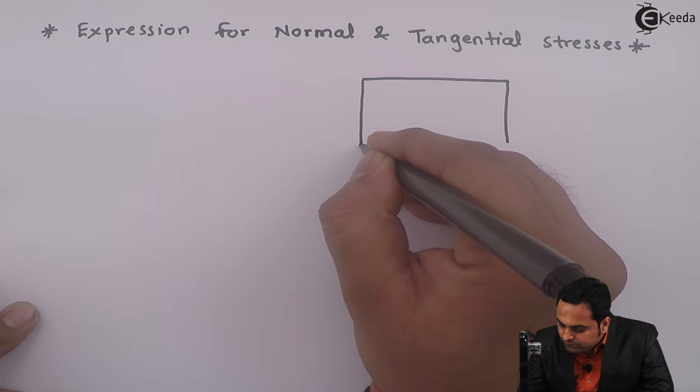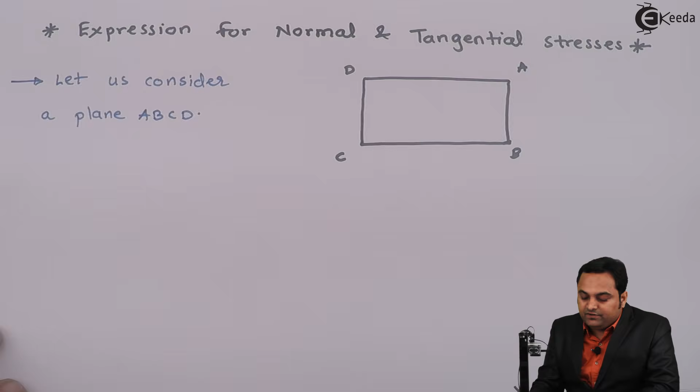Now here I have drawn a plane ABCD. I'll say that while deriving the formula, let us consider a plane ABCD. Now once I have considered this plane, the next thing is I'll denote stresses on this plane.

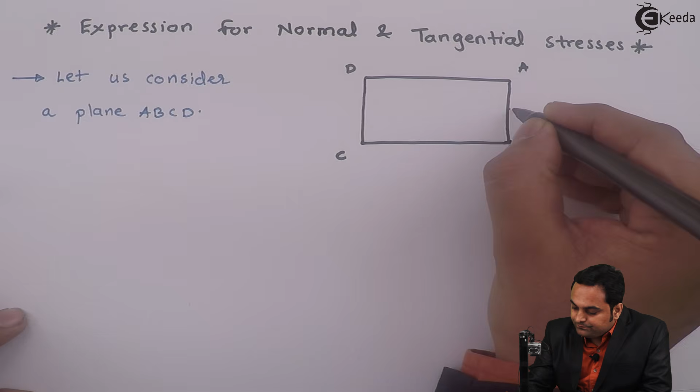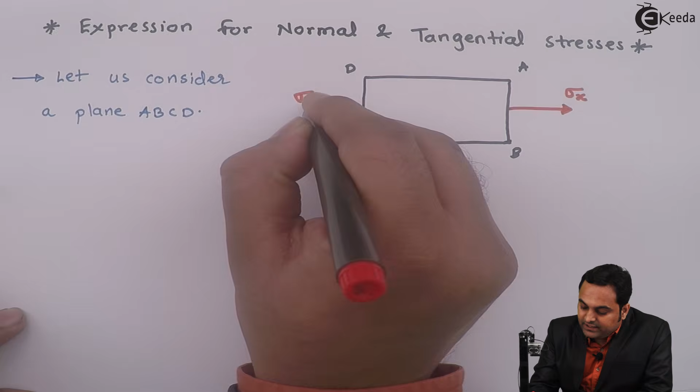So on AB, here I'll denote stress along x direction. On CD, also stress along x direction. So because of sigma x, there is tensile stress developed in this plane. Next, tensile stress along y, sigma y.

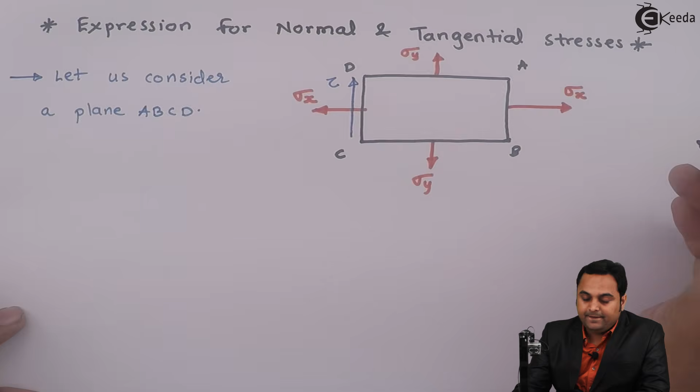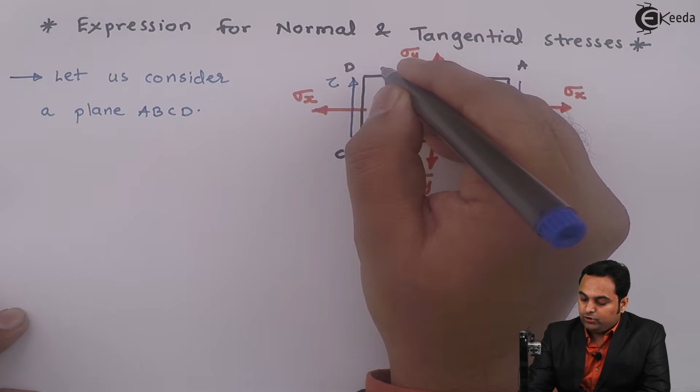Apart from this, I'll also denote shear stress tau on face CD, acting upward. So for shear stress to be produced on AB, I'll assume the shear stress is acting in downward direction. Similarly, along AD, the shear stress would be towards left. Along BC, it would be towards right.

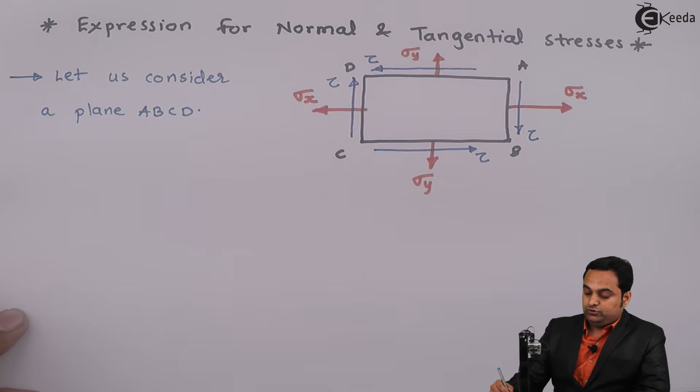So after considering the plane, I'll say let sigma x be stress along x direction, and this will be tensile stress as per our assumption. Next, similarly, I'll write for sigma y. Let sigma y be stress along y direction, that is also tensile stress.

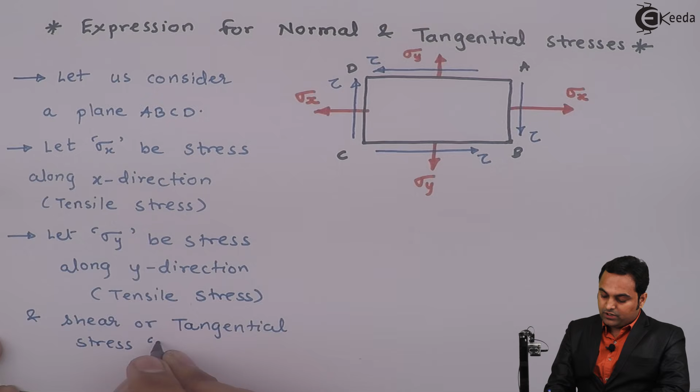Next, and shear, or I can say tangential stresses tau, which is acting on the plane.

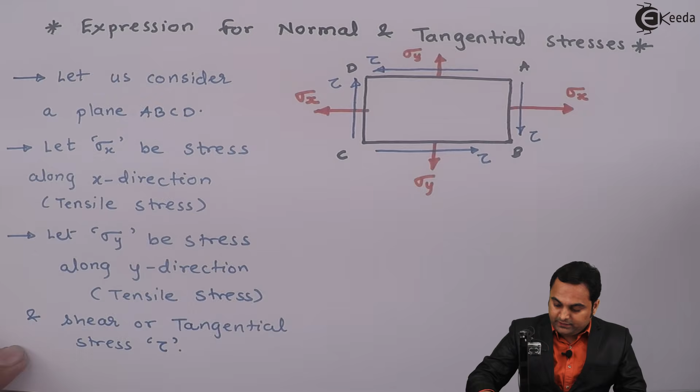Now, inside this plane, I am taking an oblique or inclined section. I'll call it A suffix E, that is AE is the inclined plane. Its inclination with the vertical AB is theta.

Now when we are deriving this expression for normal and tangential stresses, I'll consider the oblique section, and we are going to find the normal and tangential stresses on this oblique section or plane AE. So for that, I'll take this part or this triangle separate and I'll draw it here.

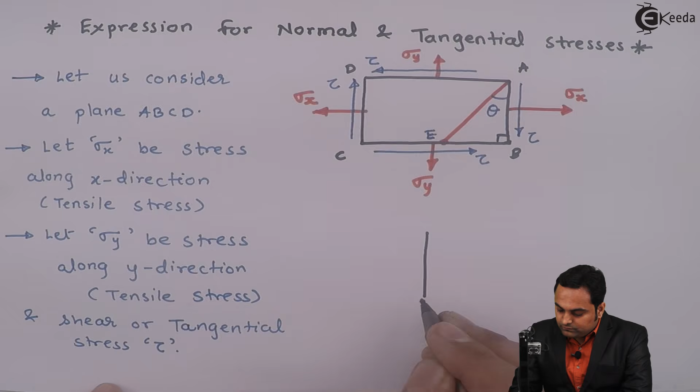Now this triangle is ABE, a right angle triangle, on which there is sigma x acting along x direction on face AB. Then there is shear stress tau acting downward on face AB. Next, sigma y is acting downward on BE, and tau is acting on BE.

Then, apart from this, on the oblique section, there will be one stress which is perpendicular to the oblique section, called normal stress, denoted by sigma suffix n. Then there will be one stress parallel to AE, and this stress will be called tangential stress.

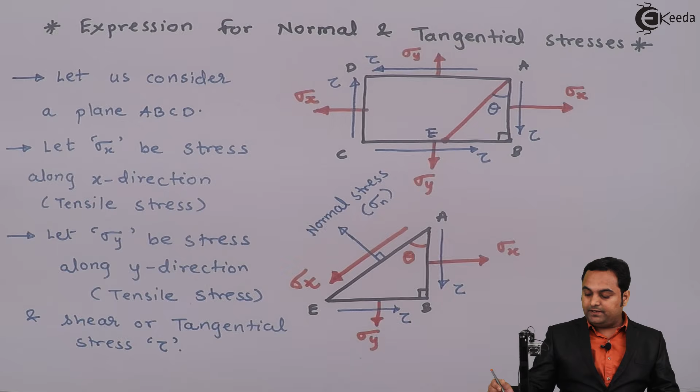So now if we see, on face AB there are two stresses, on face BE there are two stresses, similarly on AE there are two stresses. So because of these stresses there would be forces acting on the member, and here this I'll call angle theta.

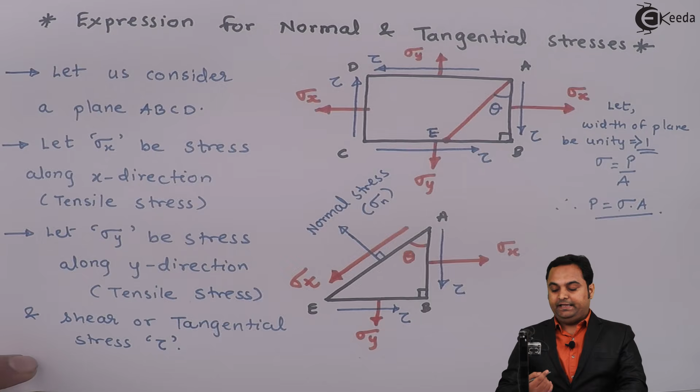So here I'll write all the forces in the form of stress into area. If I consider AB, I'll say let width of plane be unity, that is equal to 1. So if I am assuming the width as unity, area becomes AB into 1, which is AB.

So forces acting on AB, first I am considering sigma x. So because of that the force acting would be sigma x into area, which is AB into 1, because width is 1, and here we can write it as sigma x into AB. So this is the force acting on AB because of sigma x. Similarly, because of shear stress tau, this tau I'll call tau AB. So there is shear stress tau acting on face AB, and the area is AB.

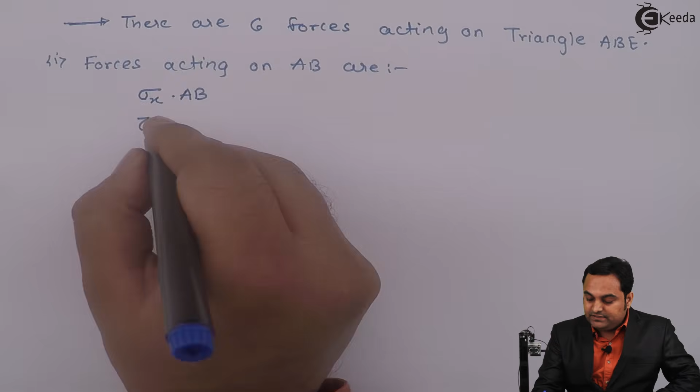So now here I have written forces acting on AB are sigma x into AB and tau into AB, because area is equal to AB into width, and here width is 1. So therefore area is equal to AB. So these are the forces acting on AB. Next, forces acting on BE, that is this side BE.

Forces acting on BE are: first there is sigma y into BE, width is 1, so area will be only BE. Next there is tau acting on BE, so tau into BE, area is only BE.

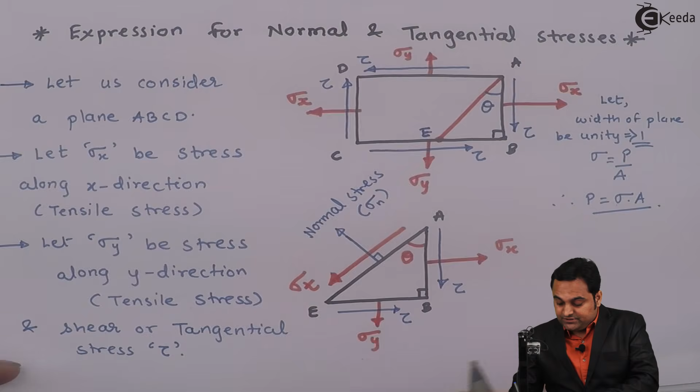Next, forces acting on AE are, as I can see in this triangle, AE is the hypotenuse. So the forces acting: first sigma n into AE, that is the normal stress into AE, area is AE into 1, so it becomes AE. Next, sigma T, that is the tangential stress, so sigma T into AE. So these are the 6 forces acting on the triangular element which we have taken out of the plane ABCD.

Now if we see in the diagram, we are having a right angle triangle and the forces are acting over that. So we are considering the inclined plane, and for us the parallel component acting upward will be treated as positive x-axis, parallel component downward will be negative x-axis, then the axis perpendicular to the inclined surface will be positive y-axis, and here we would be having the negative y-axis.

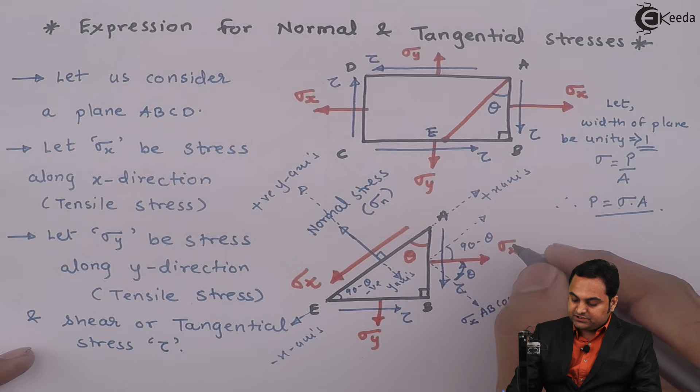So here the component is sigma x, that is the stress, and force is sigma x into AB cos theta, because I am resolving the forces. Here it is stress, force is sigma x into AB cos theta, sigma x into AB sin theta. So the first component is sigma x AB cos theta, sigma x AB sin theta.

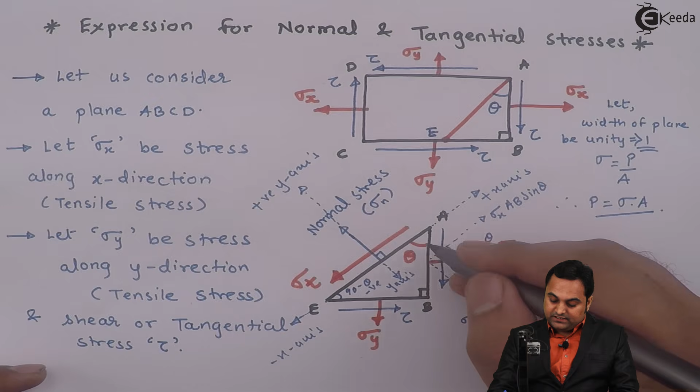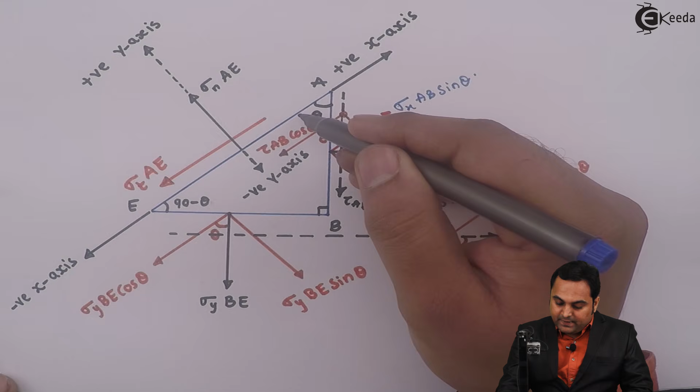Next, on this face we even have shear stress tau, which is tau AB, so tau AB is the force. Now again, if I draw a parallel component, I will get 2 components of tau AB, and that 2 components are tau AB cos theta, tau AB sin theta, because tau AB was the shear force acting on AB. Parallel to this plane I have drawn a line, so this angle becomes theta. So here we have tau AB cos theta, and here there is tau AB sin theta.

Next, if I consider the face BE, on this I am having the force sigma y into BE. Now if I draw a line parallel to the plane, here I have a component, this is inclined at theta, because theta is the inclination of the plane with vertical. Similarly for this parallel line to the plane, there is theta angle. So here I have the component sigma y BE cos theta, sigma y BE sin theta.

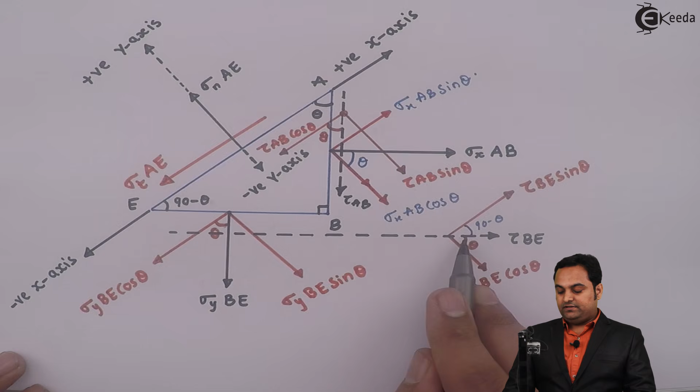Next, on this plane we have shear stress tau BE. Now if I draw a line parallel to the plane for this tau BE, here I have this angle as 90 minus theta. So this component which is perpendicular to the parallel one will have an angle theta. So tau BE cos theta, tau BE sin theta.

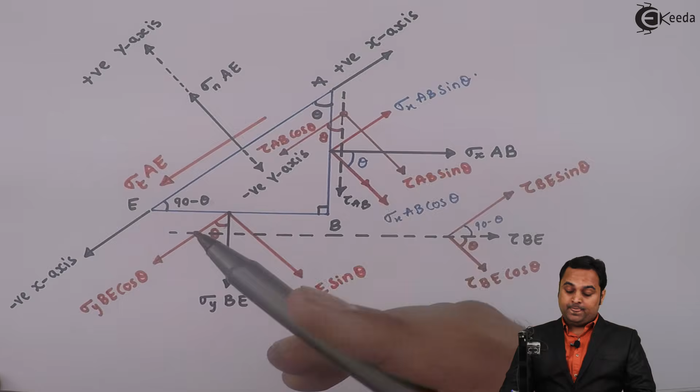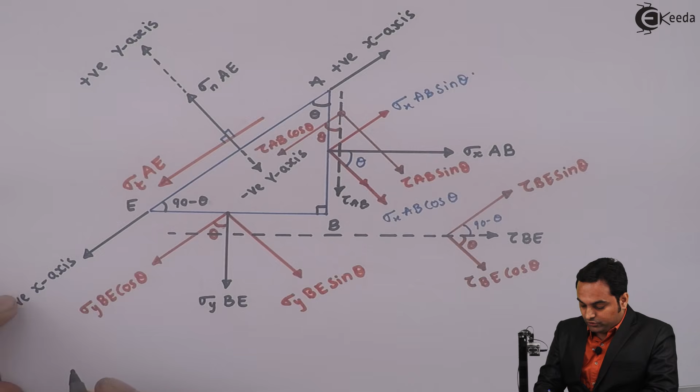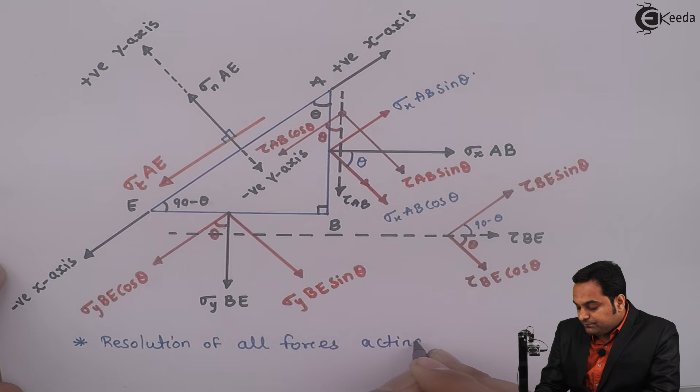Next, after we have seen faces AB and BE, at last we have face AE. Now the component which is parallel, there is no need to resolve because it is parallel to the plane, so it is sigma t AE as it is. Next, the component which is perpendicular to the plane, that is sigma n AE, it will remain as it is. So this diagram which I have drawn is actually the resolution of all forces acting on right angled triangle ABE.

So here I have resolved all the forces. Now by using this diagram, we are going to find normal stress and tangential stress, because as per the derivation we have to find the expression for normal and tangential stress, that is we have to derive the formula for sigma n and sigma t. So for that we would be using this diagram.

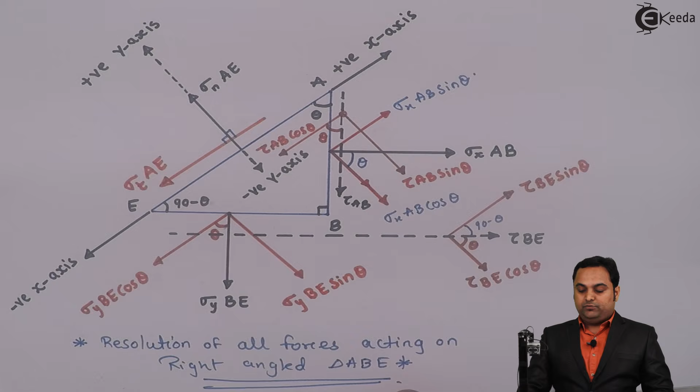Now when I am using the diagram, I'll use the conditions of equilibrium, and first I'll go for the formula of sigma n. Now sigma n is perpendicular to the plane, so it would be treated as y-axis. So I am going to resolve the forces. Now I'll say that after resolving this, using conditions of equilibrium.

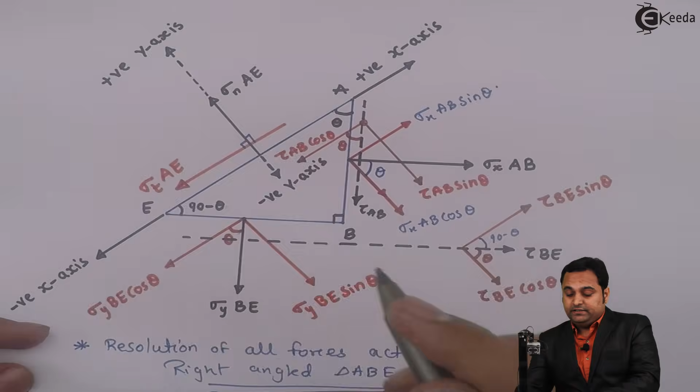Now when I am using the conditions of equilibrium, I want the sigma n formula first. So sigma n is nothing but it is acting along the y-axis. So I'll take summation of forces along y-axis equal to 0, or this can be said in this way: sum of forces along y on the left hand side should be equal to the sum of forces along y on the right hand side for equilibrium condition.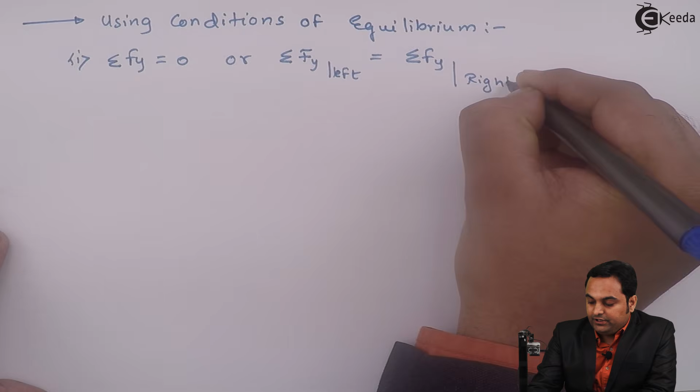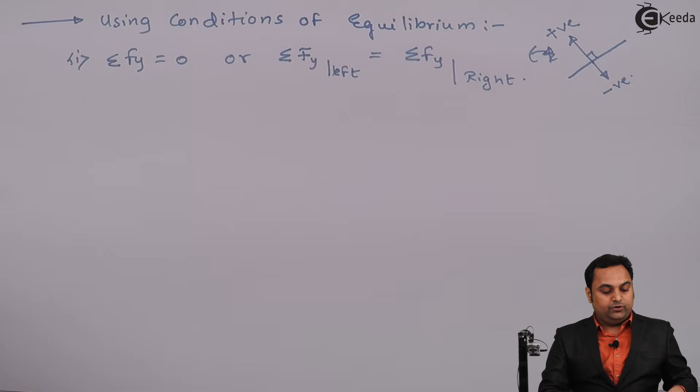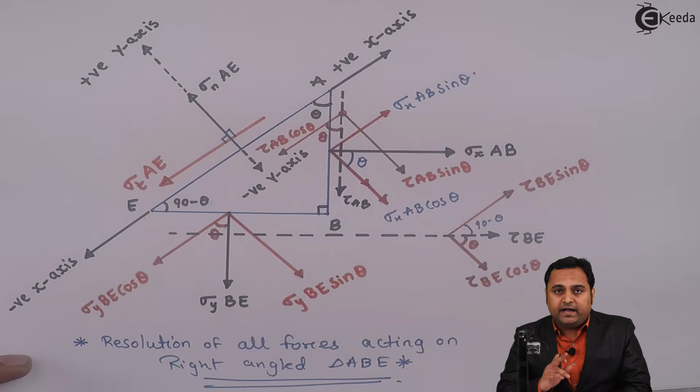The upward forces which are perpendicular to the plane, that is, if we have an inclined plane, the forces perpendicular to it acting upward are treated as positive y and downward are treated as negative y. So as per this convention, we are going to write the forces: summation of forces along left equal to summation of forces along right. We have to see first the forces which are perpendicular.

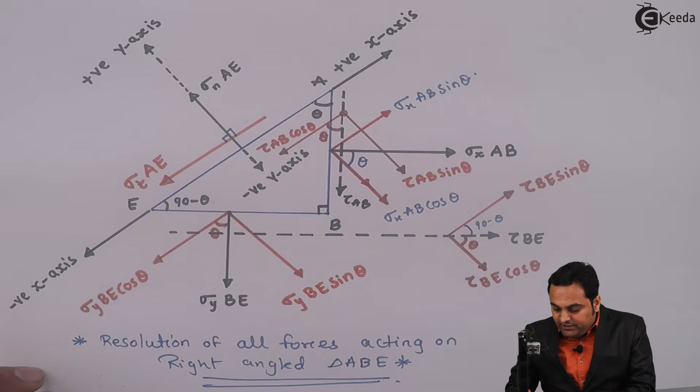Now if I see sigma n AE, it is perpendicular, so I'll consider this first; it is acting along positive y, so therefore sigma n into AE. Now if I see out of all the components which are vertical, that is perpendicular to the plane, only sigma n AE is acting upward, remaining all components are acting downward. So on the left hand side I have only sigma n AE. Now I am going to write the right hand side.

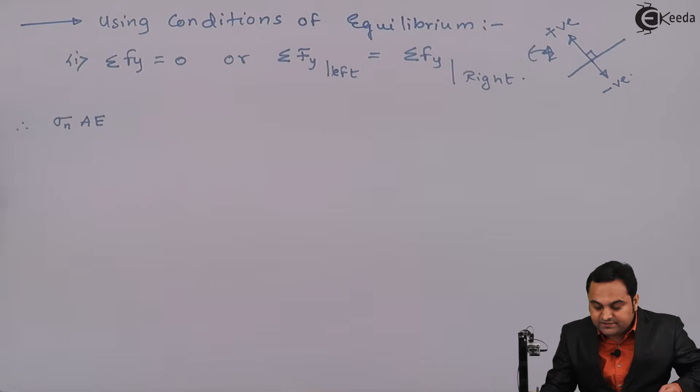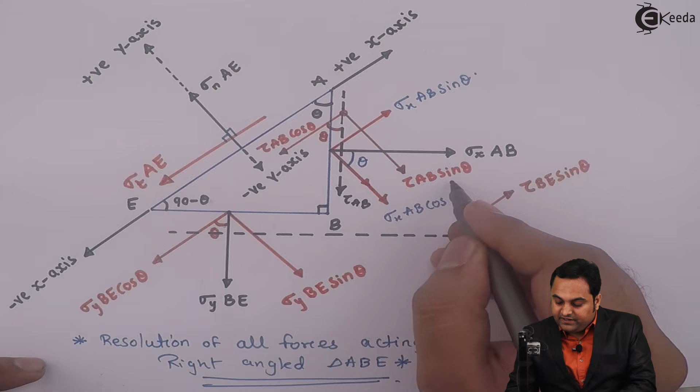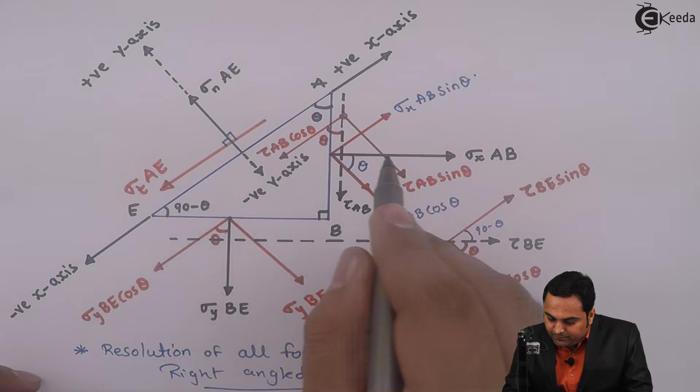For that, first I have on side AB, sigma x AB; the component sigma x AB cos theta is perpendicular to the plane acting downward, so I'll write this: sigma x AB cos theta. Next, here we even have tau AB sin theta acting downward, so plus tau AB sin theta. So on face AB, the two components which are perpendicular to the plane, I have written them.

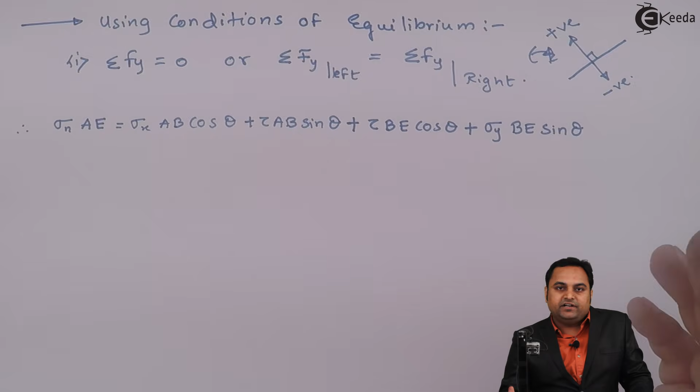Next, on face BE, here we have tau BE cos theta and sigma y BE sin theta, which are perpendicular acting downward, so negative. I'll write down plus tau BE cos theta and plus sigma y BE sin theta. Now here there is no need to take a negative sign because we are equating the forces; if we bring them on one side then we have to consider negative. Since we are equating them, there is no need of a negative sign and the resultant would be equal to 0.

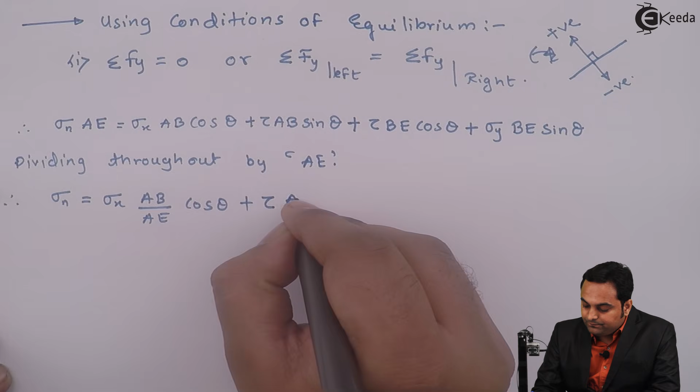Now after reaching this step, I'll say dividing throughout by AE. When I divide throughout by AE, here I have sigma n on the left hand side, AE will get cancelled. Here there is sigma x AB upon AE cos theta plus tau AB upon AE sin theta plus tau BE upon AE cos theta plus sigma y BE upon AE sin theta.

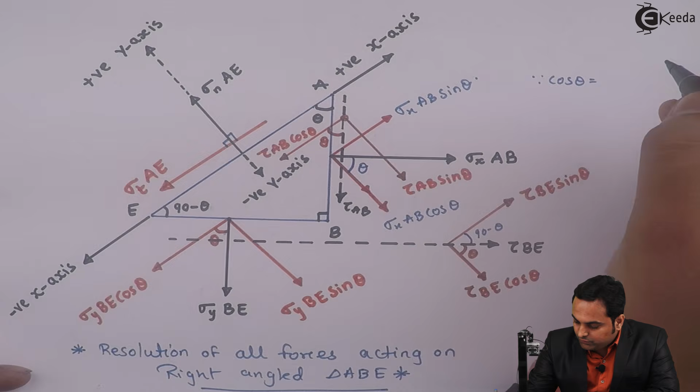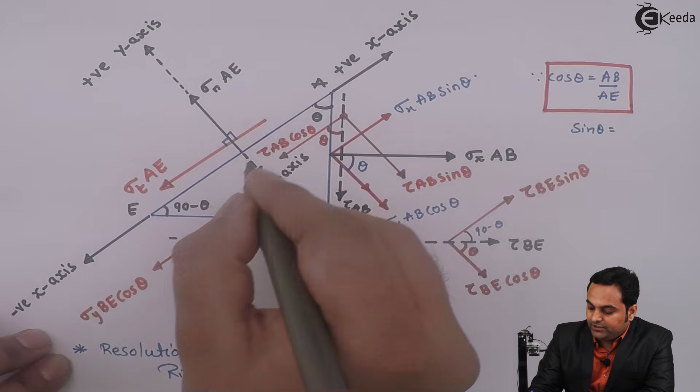Next, I'll simplify this: into the bracket I'll write down, since AB upon AE is equal to... now looking from the bigger triangle, AB is the adjacent side to theta, AE is the hypotenuse, so I'll write down cos theta equals AB upon AE, using the relation adjacent upon hypotenuse. Similarly for sine theta, it will be BE opposite to theta, BE upon hypotenuse, which is AE.

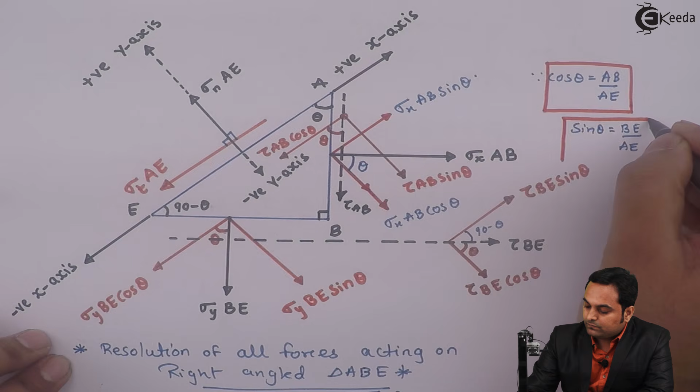Now here I have written the formula: AB upon AE is equal to cos theta, and BE upon AE is equal to sin theta. So here I'll replace AB upon AE with cos theta, and BE upon AE with sin theta.

This will be simplified as sigma n equals sigma x into AB upon AE cos theta, again we have one more cos theta, plus tau AB upon AE, that is cos theta into sin theta, plus tau BE upon AE, that is sin theta into cos theta, plus sigma y BE upon AE sin theta into sin theta. Then it can be written as sigma x cos theta into cos theta becomes cos square theta, plus here we have 2 tau sin theta cos theta, plus sigma y sin square theta multiplication.

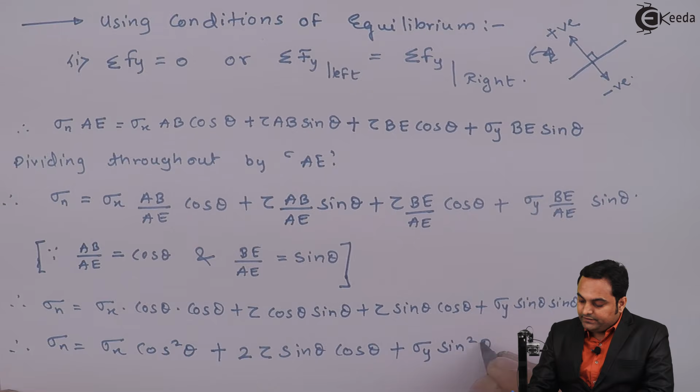Next, after reaching this stage, I will use one more formula for cos square theta, sin square theta, and 2 tau sin theta cos theta. I will write down that into the bracket: cos square theta is equal to 1 plus cos 2 theta by 2, and sin square theta is equal to 1 minus cos 2 theta by 2, and sin 2 theta is equal to 2 sin theta cos theta.

So I am going to use these formulae and replace them. Cos square theta can be written as 1 plus cos 2 theta by 2.

So therefore sigma n is equal to sigma x, cos square theta I will replace it with 1 plus cos 2 theta by 2, then plus tau, so I will keep tau as it is, plus tau, now 2 into sin theta cos theta, that is nothing but sin 2 theta, then plus sigma y I will keep it as it is, sin square theta is 1 minus cos 2 theta by 2. So here I have used the formula and written it here.

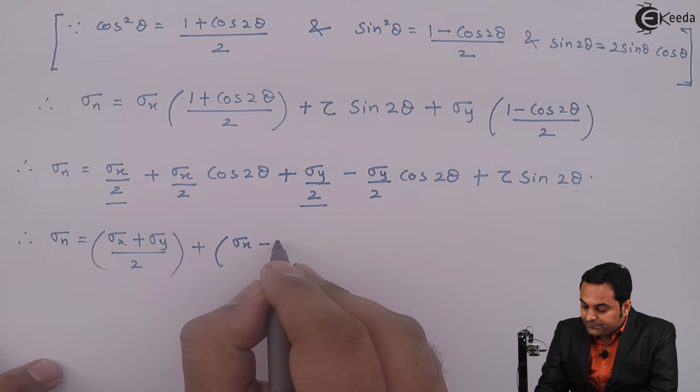So therefore from this I'll bring sigma x and sigma y together. Adding these two terms, sigma x plus sigma y by 2, bringing them together. Next, from these two terms, cos 2 theta can be taken common, so it can be written as plus sigma x minus sigma y by 2 into the bracket cos 2 theta, because I can take cos 2 theta common. Next, at last we have plus tau sin 2 theta.

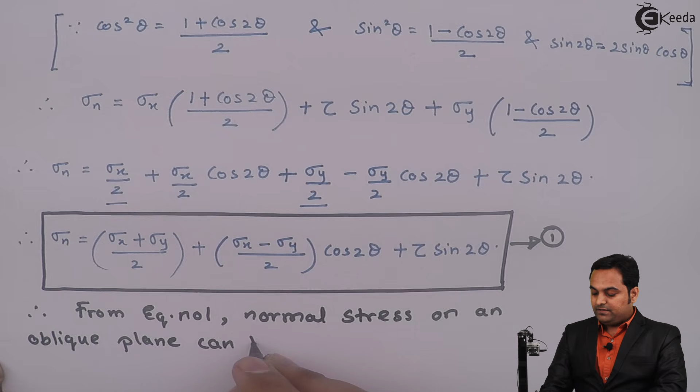So this is my equation number 1, and I have got the formula or expression for normal stress. Half of the derivation is done here. I can say that therefore from equation number 1, normal stress on an oblique plane can be calculated.

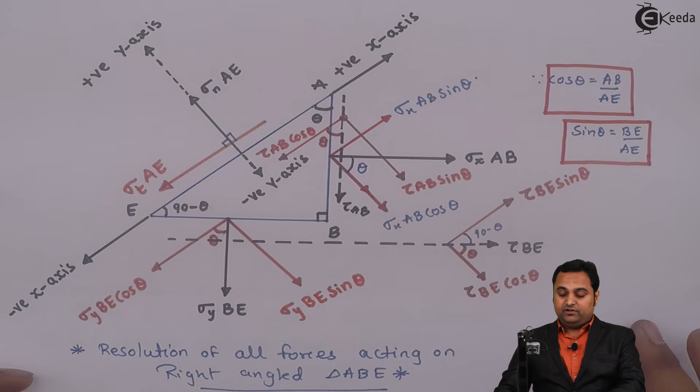Next, as I have used the first condition of equilibrium to get the formula of sigma n, now I'll use the second condition of equilibrium, that is summation of fx, to get tangential component or tangential stress sigma suffix t.

So after reaching here, I'll say that therefore again by the condition of equilibrium, summation of fx is equal to 0, or I can say that sum of forces acting along x on left hand side is equal to sum of forces acting along x on right hand side.

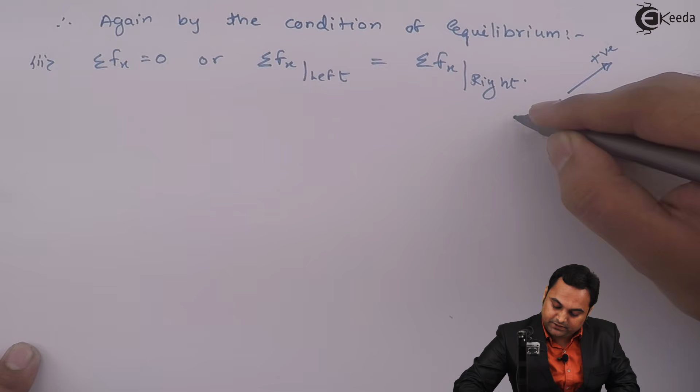And here, for the parallel plane, forces acting parallel and up the plane are positive, forces acting parallel and down the plane are taken as negative. So now here I am taking the second condition of equilibrium, that is summation of all forces on left hand side should be equal to the sum of all forces on right hand side.

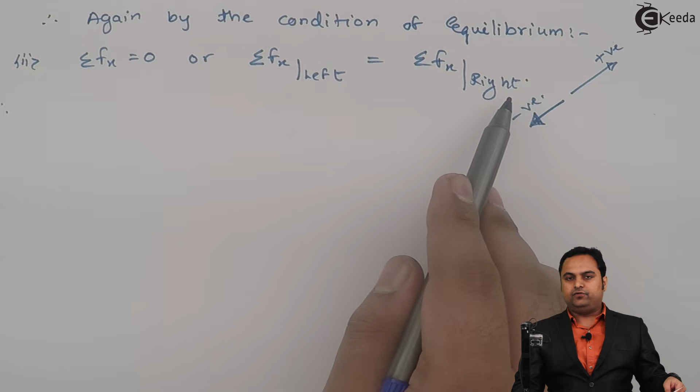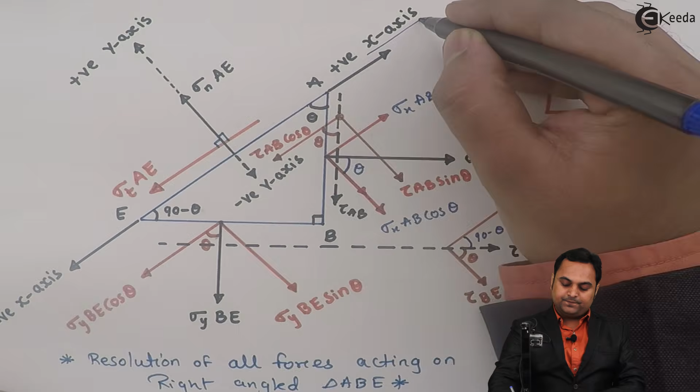Now here if I consider this diagram, the forces which are parallel to the plane are along x, which are upward parallel to the plane are on positive x axis. Forces which are parallel and acting downward are on negative x axis. So here if I see sigma t into AE, that is acting downward and parallel, so negative.

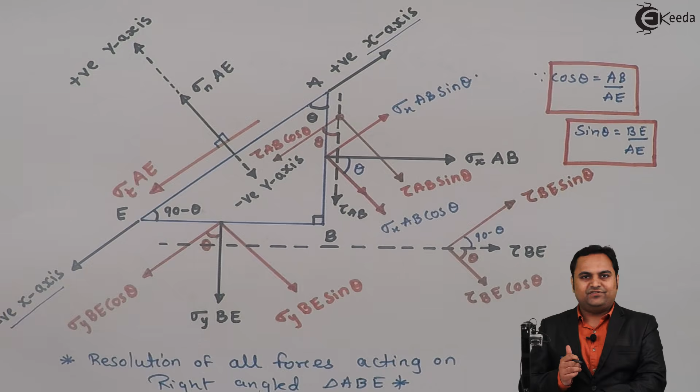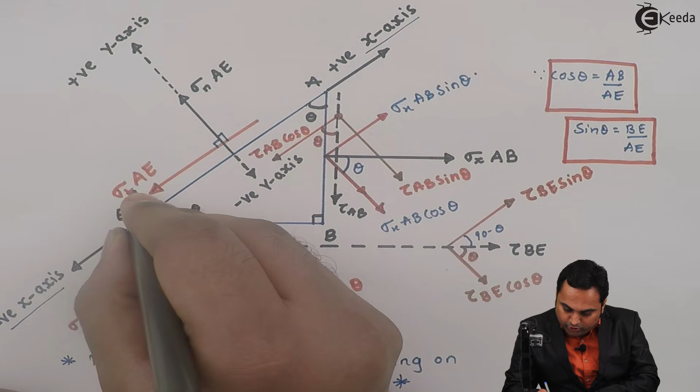So what I am doing here, instead of writing negative, I am equating the forces on left hand side, right hand side, so there is no need to write negative sign. So sigma t AE, then here we have tau AB cos theta, that is also acting along sigma t AE, their direction are same, so plus tau AB cos theta.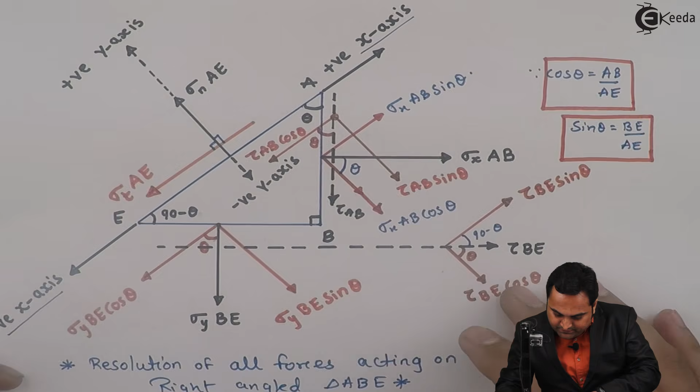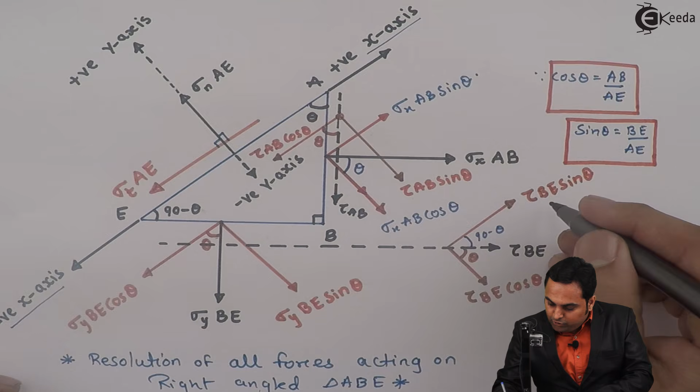Next we have sigma y BE cos theta acting parallel and downward. Now these forces acting downward and parallel are equal to the forces acting upward and parallel. Out of them we have sigma x AB sin theta acting parallel and upward, then we have tau BE sin theta acting parallel and upward.

Then here we have only these forces which are acting on the right hand side. Now I'll keep sigma t AE on one side because I want the expression for tangential stress. Shift all terms on the other side. So sigma x AB

sin theta plus tau BE sin theta, then minus tau AB cos theta minus, I am sending this term onto the other side, so minus sigma y BE cos theta.

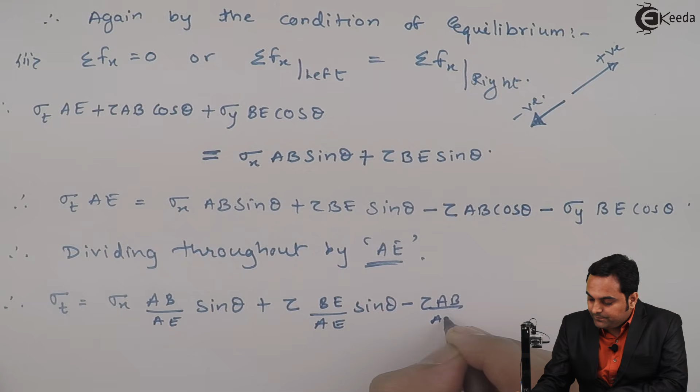After this I will say that therefore dividing throughout by AE, here AE and AE will get cancelled out, so sigma t is equal to sigma x, it will be AB upon AE sin theta plus tau BE upon AE sin theta minus tau AB upon AE cos theta minus sigma y BE upon AE cos theta.

Now previously we have seen that since cos theta is AB upon AE and sin theta it was BE upon AE.

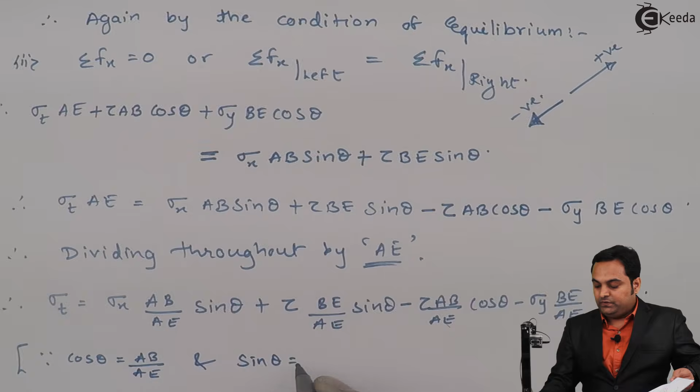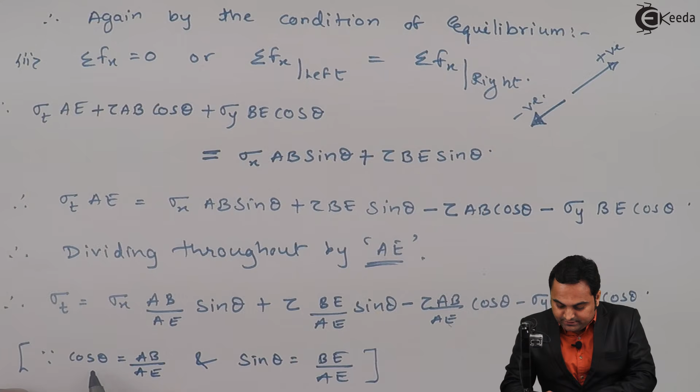So here I will replace AB upon AE with cos theta, BE upon AE with sin theta, and writing this equation again. So I have sigma x will remain as it is, AB upon AE that is cos theta, plus here we have tau BE upon AE, in place of that sin theta into sin theta. Next minus tau AB upon AE is cos theta into cos theta again, then minus sigma y BE upon AE sin theta into cos theta.

Now here I have written this equation. In that I can write it in this way, that here we have sigma x sin theta cos theta. I'll bring this term here, so minus sigma y sin theta cos theta, then plus here I have tau sin theta into sin theta becomes sin square theta, minus tau cos theta that becomes cos square theta.

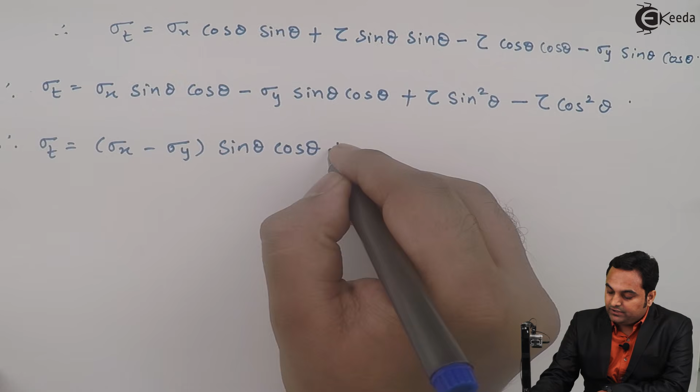So therefore here sigma t will be equal to, I can take sigma x minus sigma y together and taking sin theta cos theta common, plus here in this case as well I can take the term, here I am having plus tau. So what I'll do to write it in a more effective way, I'll take minus tau common, so into the bracket I am left with cos square theta minus sin square theta, because I want to write it in some special form, that is why I am taking minus tau common.

Next here I'll be multiplying this sigma x minus sigma y term by 2. So here I have 2 sin theta cos theta and dividing this by 2, so multiply and divide by 2 this term. So once 2 and 2 get cancelled, it is the same thing. Next here I have minus tau. Instead of cos square theta sin square theta, we can write it in this way, that it is cos 2 theta, because the formula is cos 2 theta is equal to cos square theta minus sin square theta.

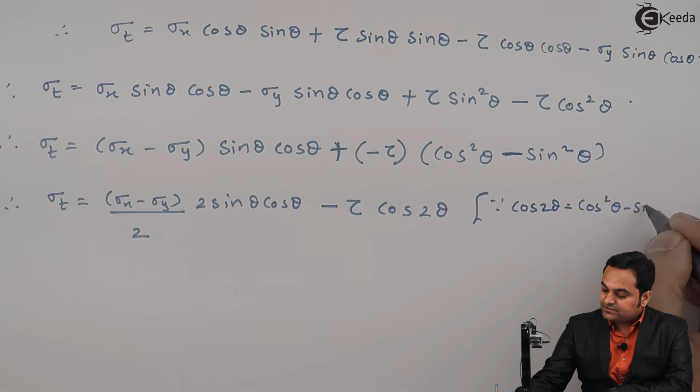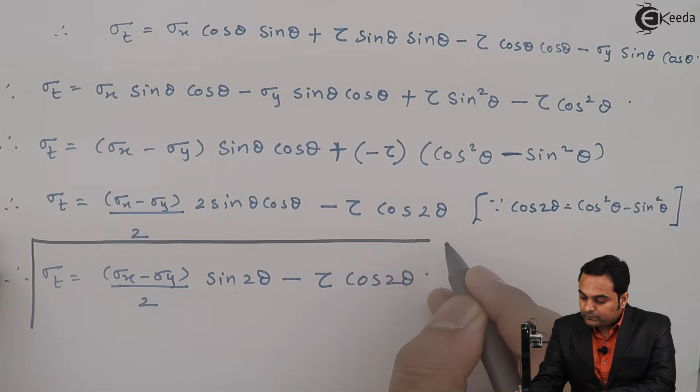Next, tangential stress will be equal to sigma x minus sigma y by 2, here 2 sin theta cos theta, that is sin 2 theta, minus tau cos 2 theta. I'll highlight this equation. This is equation number 2, and I can say that therefore from equation number 2, tangential stress can be calculated. So here I have finished the derivation part, that is we have calculated or we have derived the formula of both normal stress and tangential stress acting on an inclined plane.

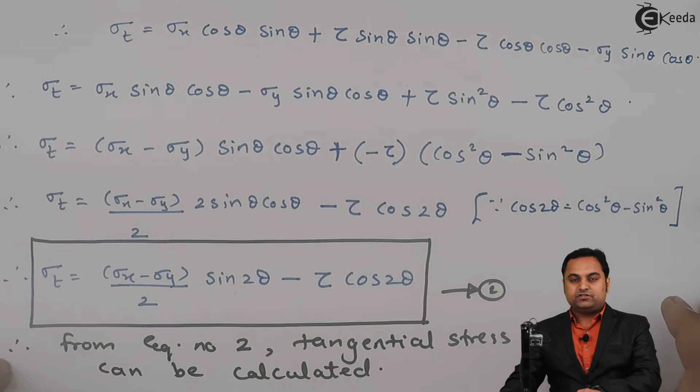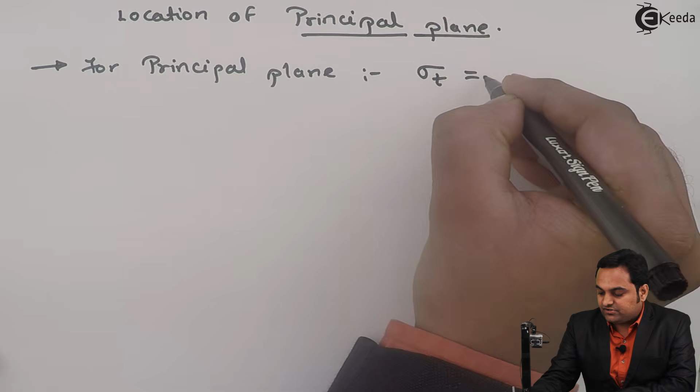Now one more thing, this theta is called as the location of principal plane. So I'll find the equation. This is just an addition part, that is location of principal plane. So once we know that principal plane, it is that plane which carries only normal stress and no tangential stress. So for principal plane, tangential stress is 0, because as per the definition of principal plane, it is that plane on which only normal stress is there. So tangential stress will become 0.

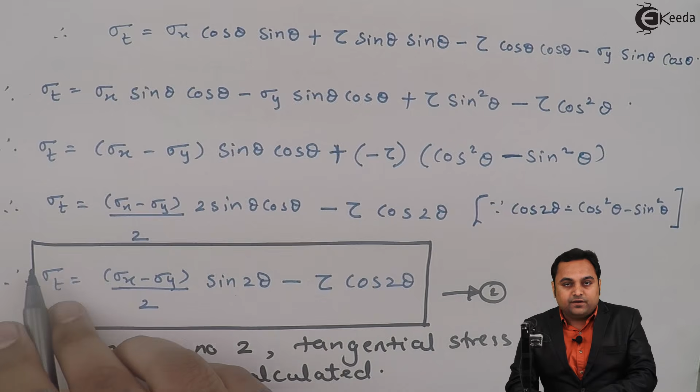So I'll say that therefore equation number 2 becomes, here we have in equation 2 the tangential stress, if this becomes 0, because we want to find the location of principal plane, we can write it in this form: sigma x minus sigma y by 2, sin 2 theta minus tau cos 2 theta is equal to 0. So therefore I'll shift this term onto the other side. So here we have sigma x minus sigma y by 2 sin 2 theta is equal to tau cos 2 theta. Therefore keeping sin 2 theta on one side and bringing cos 2 theta in the denominator.

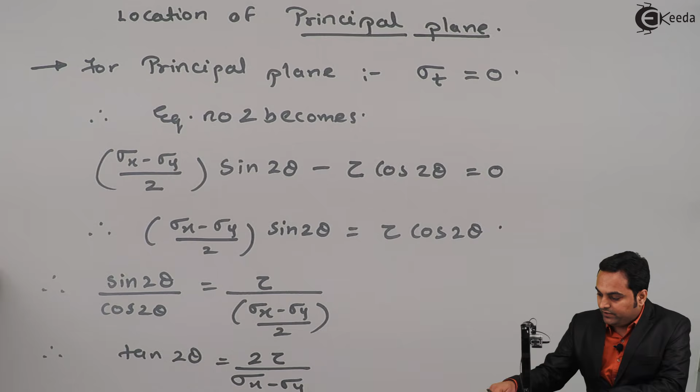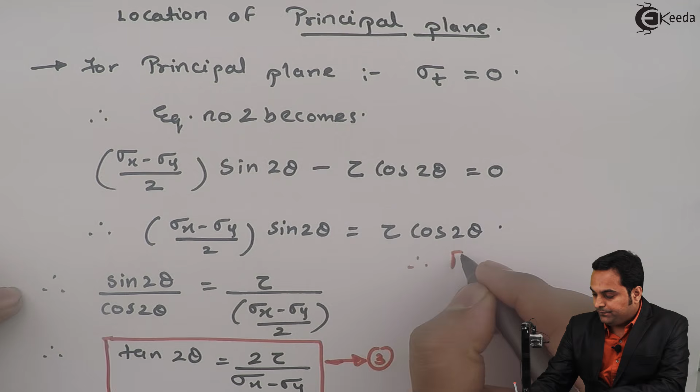Here we have tau upon sigma x minus sigma y by 2. So therefore, I can write this in this form, that tan 2 theta will be equal to, this 2 will go into the numerator, 2 into tau upon sigma x minus sigma y. So here I have one more expression, that I can say that this is equation number 3. So therefore, from equation number 3, the location of principal plane can be found out.

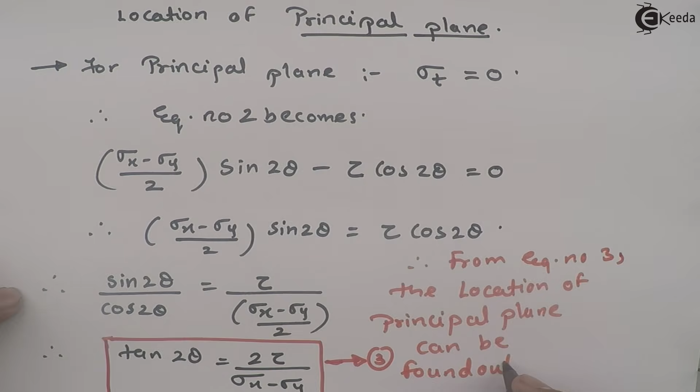So here in this derivation we have seen the expression of normal stress, tangential stress and the location of principal plane. With this we complete the derivation part.